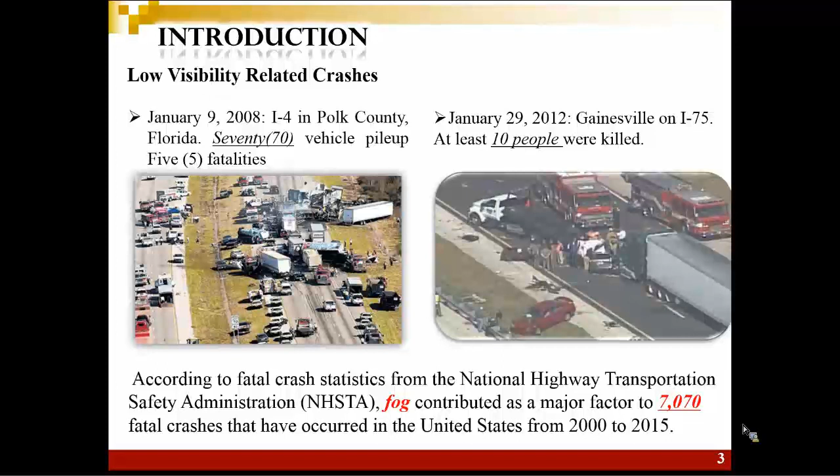In 2008, a 70-vehicle pile-up happened in Florida, causing 5 fatalities and many injuries. Another example happened in 2012, where at least 10 people were killed in that crash. Next slide, please.

In previous studies, a number of studies have investigated the change of driver behavior under fog conditions. Since some drivers tend to reduce their headway distance during fog, they may not have enough response time to react to dangerous situations, even if they reduced their speeds, which results in an increase of rear-end crash risk. Our previous study analyzed traffic patterns and found that both volume and speed under fog condition dropped significantly. By proposing a crash risk increase indicator, we confirmed that crash risk could increase under fog condition.

We also investigated the impact of fog warning systems, which include dynamic message signs and beacons as shown in the pictures, on drivers' speed adjustment for fog condition using a driving simulator study. We found that the warning system could significantly affect drivers' speed adjustment before they drive into the fog area, but could not sufficiently change drivers' final speed after entering the fog area.

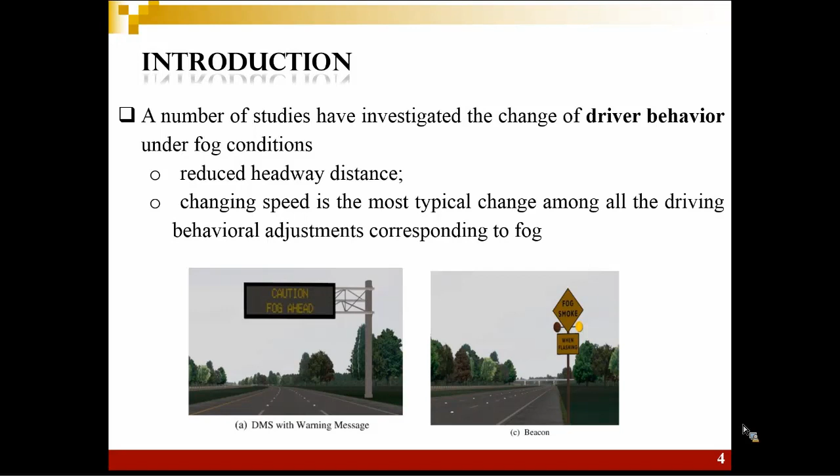Next slide, please. In recent years, connected vehicle crash warning systems are gaining increasing attention, which display a vista for enhancing traffic safety under fog conditions. Previously, crash warning systems were based on sensors and video cameras. However, bad weather could reduce the system's accuracy. Connected vehicles could further improve the performance of crash warning systems by deploying vehicle-to-vehicle communication or vehicle-to-infrastructure communication.

Vehicle-to-vehicle communication can provide real-time position and speed of the lead vehicle. Thus, the crash warning system can detect the sudden slowdown or stop of the lead vehicle and timely alert the drivers of the following vehicle with in-vehicle warning messages. Many driving simulator studies have been conducted to explore the impact of crash warning systems, while drivers' response time, throttle release behavior, brake pedal behavior, and time to collision could be deployed to evaluate their effectiveness.

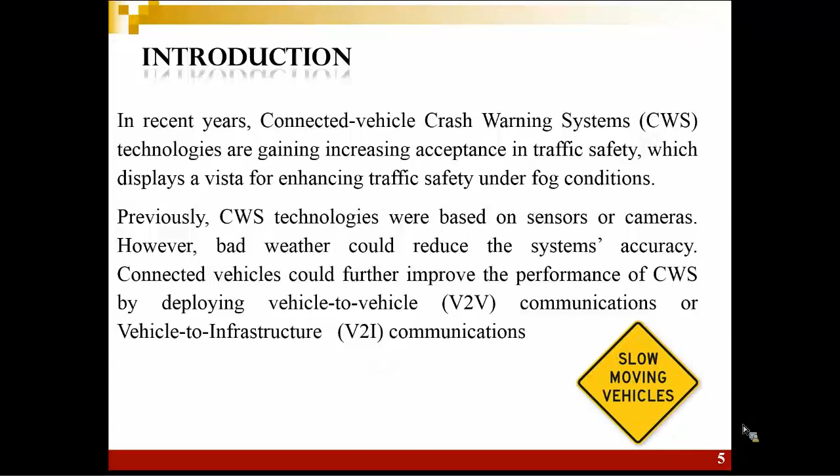Next slide, please. The safety benefit of crash warning systems has been evaluated in previous literature, and many studies have indicated that the warning system could effectively help reduce rear-end crashes. However, there is a lack of study on the safety effectiveness of crash warning systems on rear-end crashes under fog condition. Therefore, different from our previous study, which investigated the effect of warning systems on drivers' behavior in fog, the current study aimed to examine the effect of crash warning systems on drivers' rear-end crash avoidance behavior under fog condition, based on a driving simulator experiment.

Specifically, the objective of this study is to investigate whether warning systems have significant effects on drivers' rear-end crash avoidance performance when the lead vehicle makes an emergency stop. So now, let's look at the experimental design of this study.

The experiment was designed as a mixed factorial design with warning type as the within-subject variable, and fog level and age as between-subject variables.

Our previous study suggests that fog could have a significant effect on drivers' behavior when the visibility distance is less than 300 feet. So 300 feet was selected as the moderate fog condition in this study. Also, it was suggested that drivers could have very high crash risk in fog conditions when visibility distance is very low, since drivers could not have enough time to respond to an emergency. So 100 feet visibility distance was selected as the dense fog condition to test the effects of the warning system under dangerous situations.

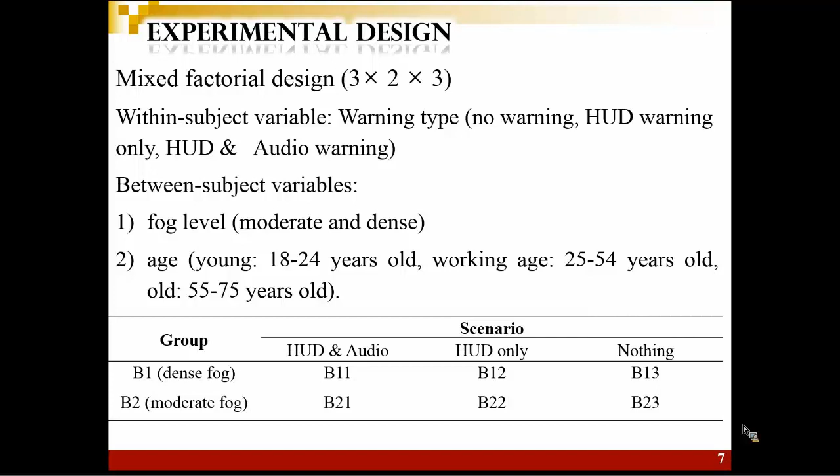An advanced driving simulator was used for this experiment. The simulator provides a 130-degree horizontal by 24-degree vertical field of view in front of the seated participant with 3 screens. Two speakers were installed in front to simulate the sound of passenger cars and deliver audio warning messages, and a third speaker was mounted below the driver's seat to simulate road vibrations.

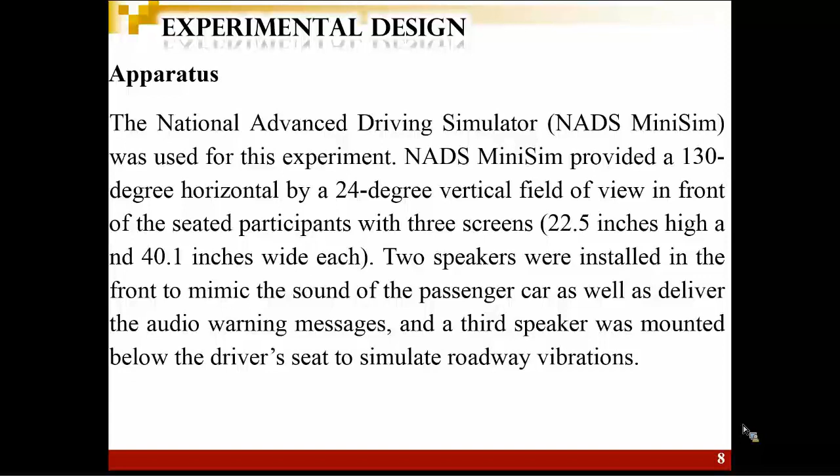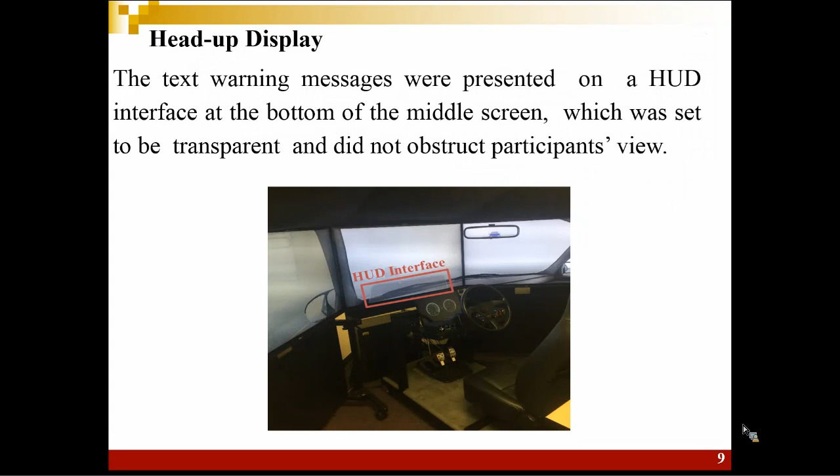As we can see from the picture, the text warning messages were presented through the HUD interface at the bottom of the middle screen, which was set to be transparent and would not obstruct the participant's view. The simulator was equipped with a 4-channel video capture system and collected driving data at a rate of 60 Hz.

Totally, 54 participants were recruited in this study, regardless of the driver's socioeconomic status. Each fog level had 27 participants, with 9 participants in each age group, and each participant performed the experiment under 3 warning conditions: no warning, HUD warning only, and HUD with audio warning.

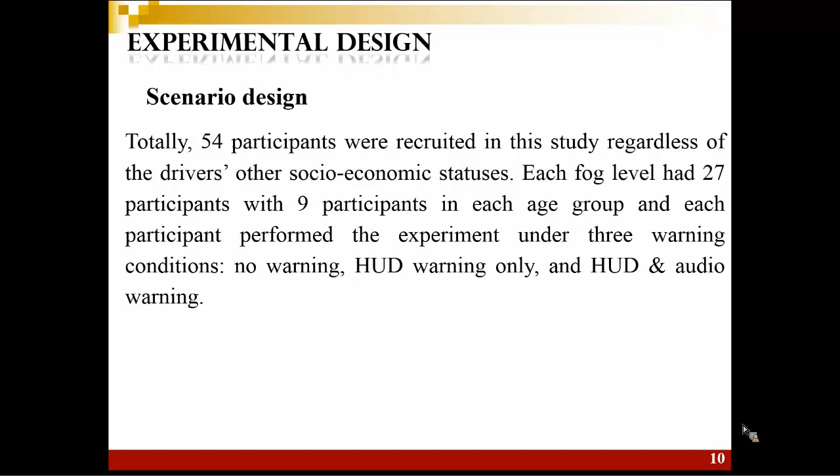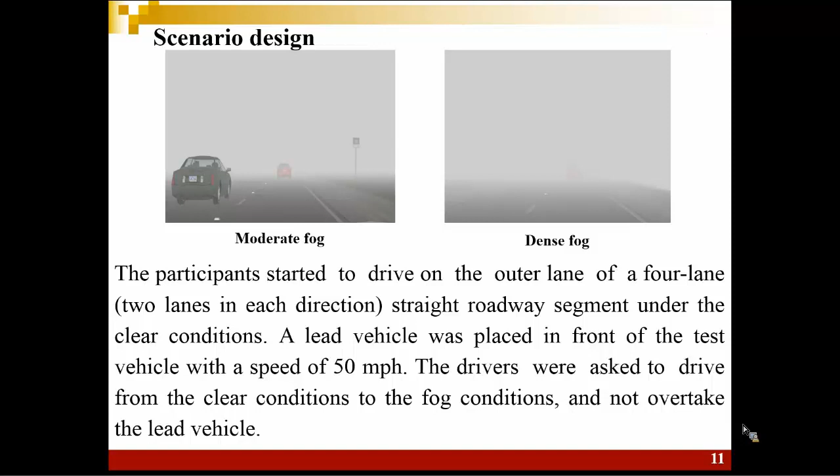These figures show the moderate fog condition and the dense fog condition during the experiment. Participants start driving on the outer lane of a 4-lane straight roadway segment under clear conditions. A lead vehicle was placed in front of the test vehicle with a speed of 50 miles per hour. The driver was asked to drive from the clear condition into the fog condition and not overtake the lead vehicle.

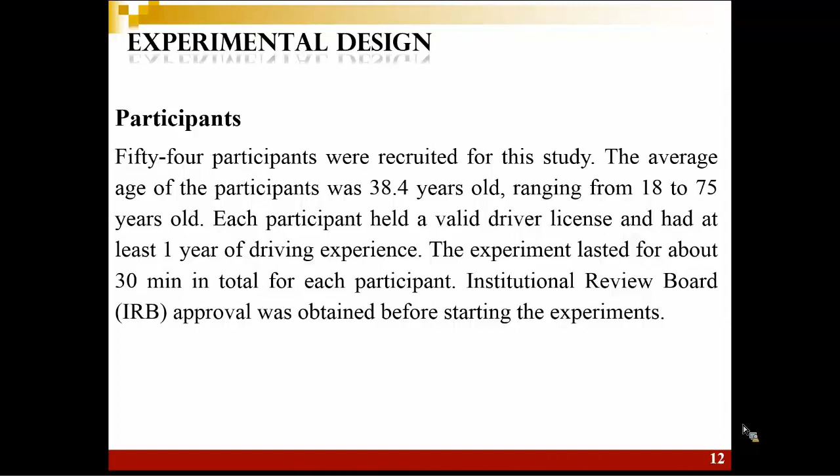54 participants were recruited for this study. The average age of participants was about 38 years old, ranging from 18 to 75 years old. Each participant had a valid driver's license and at least 1 year of driving experience. The experiment lasted about 30 minutes in total for each participant. IRB approval was obtained before starting the experiments.

Upon arrival at the lab, each participant was briefly introduced to the requirements of the experiment, and all participants were required to read and sign a consent form. Participants were notified that they could quit the experiment at any time in case of motion sickness.

Before the formal experiment, participants had at least 10 minutes to get trained and become familiar with operating the driving simulator. Then they performed a formal driving simulator experiment under either moderate or dense fog conditions with 3 different warning conditions in random order.

It should be noted that the gender of the participant was also carefully considered when assigning the age groups. Between each trial, participants could have at least 5 minutes to rest. After the experiment, participants were required to complete a survey about their experience with the scenarios.

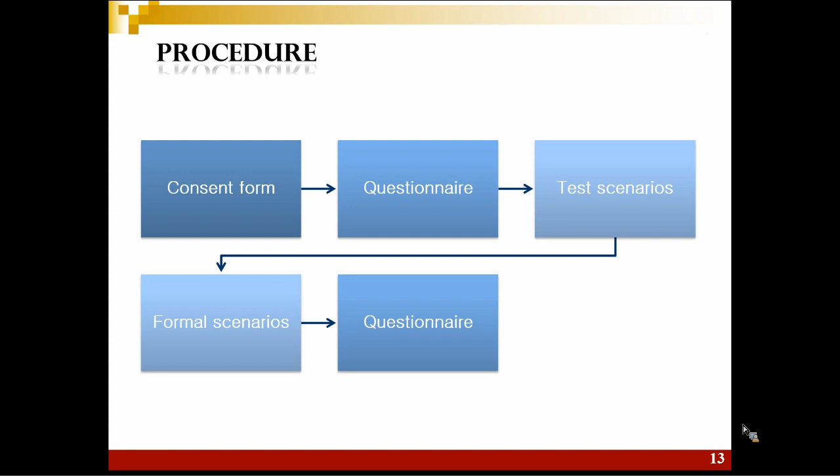During the experiment, after the lead vehicle started to decelerate, the warning message would be delivered based on the headway distance between the test vehicle and the lead vehicle. To avoid the cry-wolf effect of a premature warning message, the headway distance for delivering the warning message was carefully determined.

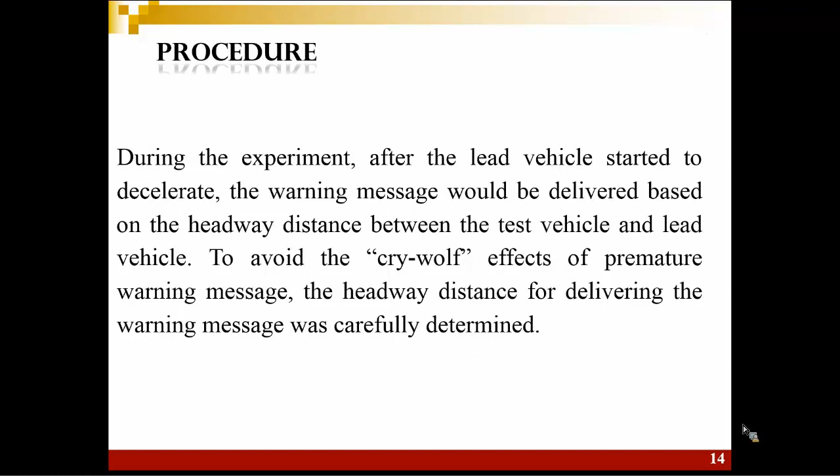Now let's look at a short video which shows an example of the studied scenario.

As we can see from the video, once the warning system was triggered during the experiment, the HUD warning would display the words 'slow vehicle ahead' for about 1 second. The HUD and audio warning delivered a beep sound along with the HUD message.

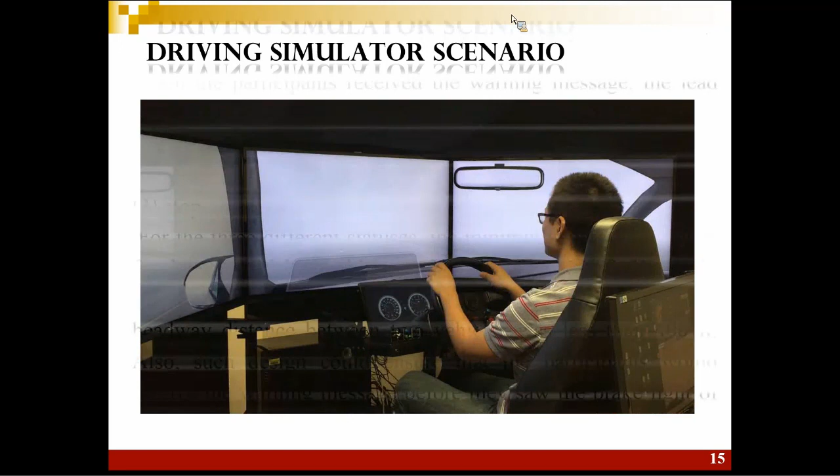When the participant received the warning message, the lead vehicle could be in 3 different states: starting to decelerate, decelerating, or stopped. For these 3 states, the minimum stop distance for the test vehicle would range from 110 feet to 351 feet. Hence, in this study, the warning message was delivered when the headway distance between the two vehicles was less than 400 feet. This design also ensured that participants would receive the warning message before they saw the brake light of the lead vehicle.

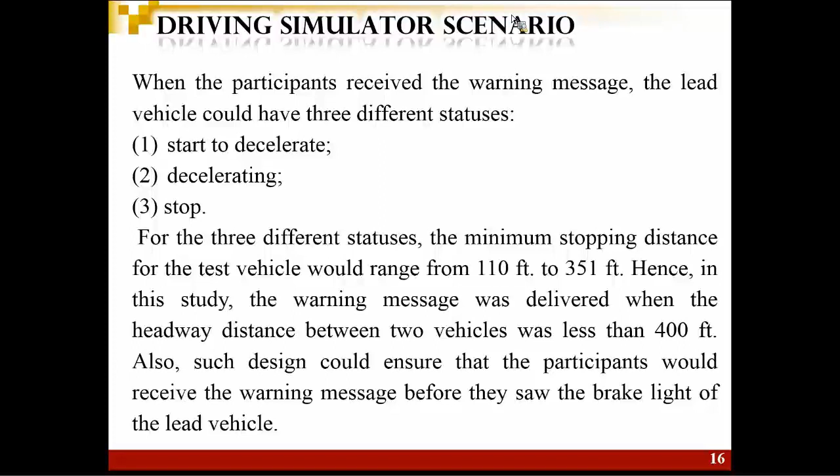We have some short videos to demonstrate driver crash avoidance behavior during the experiment. One video will show the change in the lead vehicle and following vehicle's speed, and another video will show the status of the throttle pedal and brake pedal. From the video, we can see that the driver releases the throttle when they notice the event and then begins to use the brake pedal.

This figure shows a typical example when the lead vehicle was braking. Based on the key time moments shown in the figure, several critical measurements were defined to evaluate participant driving performance.

Time to initial throttle release, time to final throttle release, and time to initial brake were used to analyze driver's throttle release behavior. Time to initial throttle release is the time between the onset of the lead vehicle's braking and when the participant begins to release the throttle pedal. Time to final throttle release is the time between when the participant began releasing the throttle pedal and when they completely released it.

Time to initial brake is defined as the time between when the participant completely released the throttle pedal and when they begin to press the brake pedal. Similarly, time to 25% of brake, 50%, 75%, and maximum brake were used to analyze the status of the brake pedal.

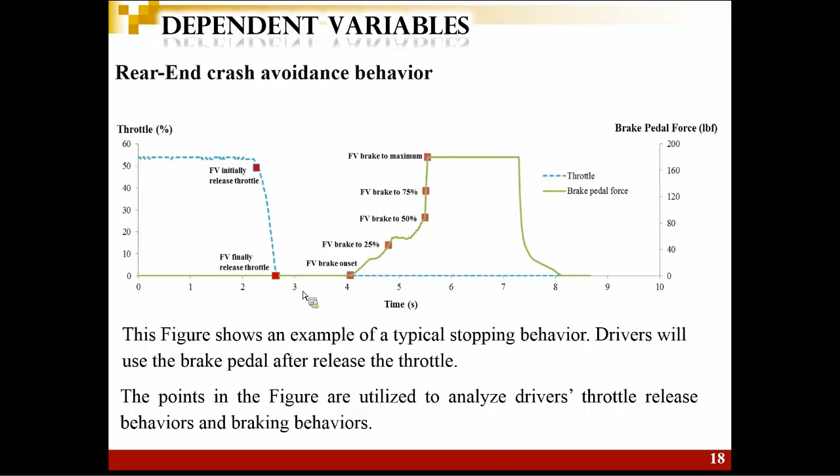Three other dependent variables are included in this study. The first is brake reaction time, defined as the time between the lead vehicle's brake onset and when the participant begins to brake. The second is minimum time to collision, defined as the time it would take for the test vehicle to hit the lead vehicle given their current speeds are maintained.

The minimum value is selected from the time interval between when the lead vehicle starts to brake and when the driver brakes to stop behind it. The last variable is maximum brake pedal pressure, the maximum value of brake pedal pressure observed during the braking event.

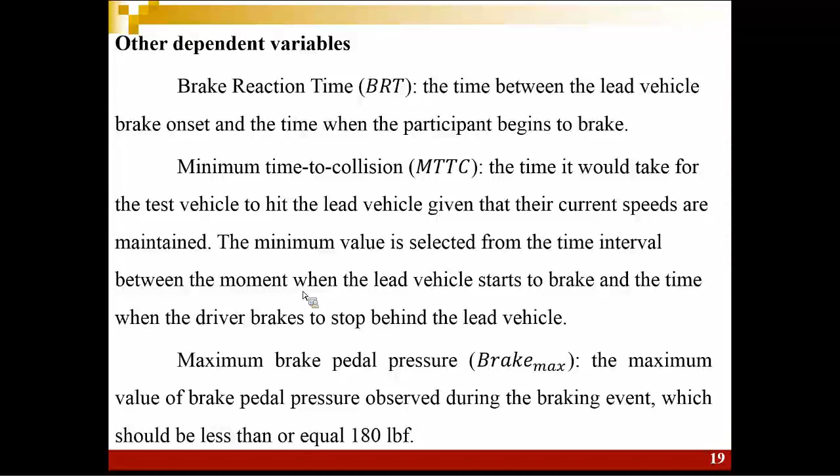For measuring participants' rear-end crash avoidance behavior, repeated measures MANOVA was conducted for throttle release measurements and brake transition time measurements, where high correlations were expected. MANOVA is a type of multivariate analysis used for data with more than one dependent variable, and it controls the overinflation of Type 1 error.

Repeated measures ANOVA was then conducted on the significant variables found by MANOVA analysis. For significant factors with more than two groups, post-hoc analysis was conducted to further compare differences. For other measurements including response time, minimum time to collision, and maximum brake pedal pressure, only repeated measures ANOVA and post-hoc analysis were performed. The statistical significance level was set at 0.1.

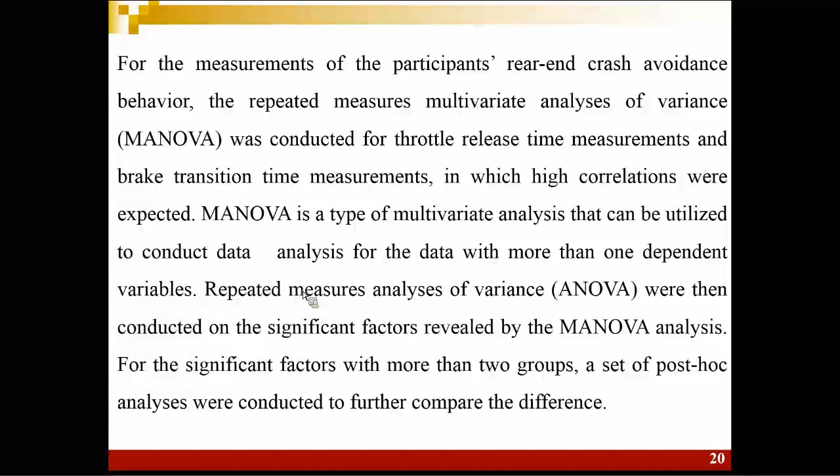So now let's move on to experiment results.

Although 54 participants were recruited in this experiment, only data from 48 participants were collected for analysis, since 6 participants could not finish due to motion sickness. Of the complete 144 trials, 7 were excluded because some participants chose to steer instead of braking to avoid hitting the lead vehicle, and some drove too slowly to follow the front vehicle. A dataset containing information for 137 trials was created for this analysis.

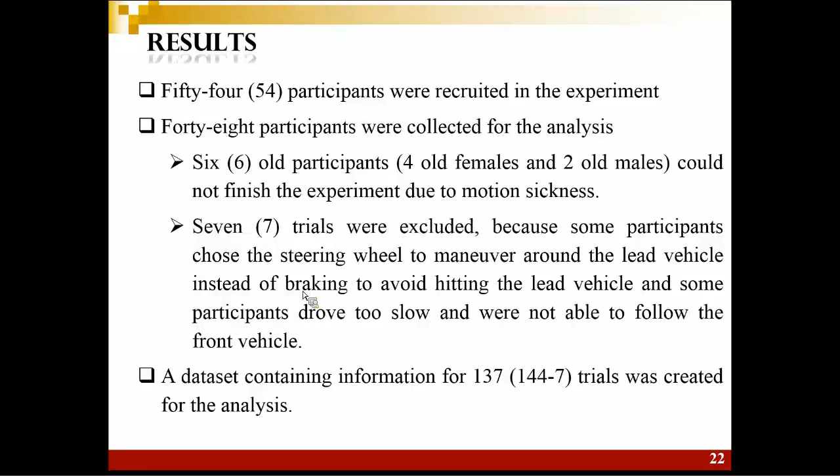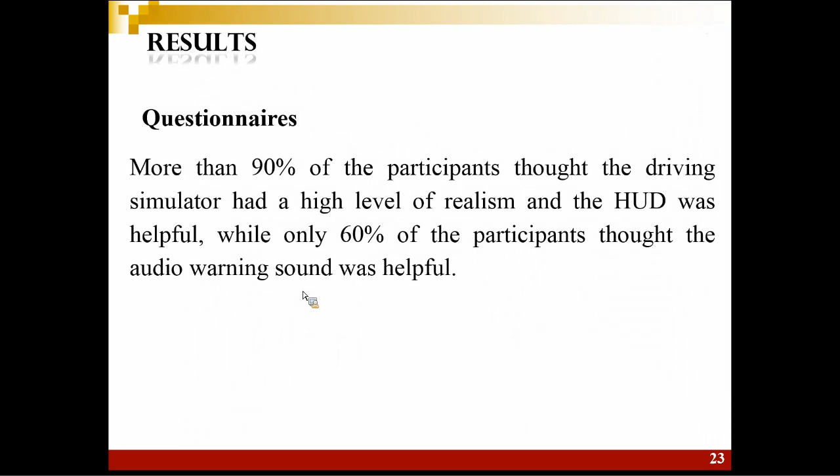For the questionnaire results, more than 90% of participants thought the driving simulator had a high level of realism and that the HUD was helpful, while only 60% thought the audio warning sound was helpful.

Three measurements were employed to assess participant throttle release time: time to initial throttle release, time to final throttle release, and time to initial brake. The repeated measures MANOVA analysis suggests that only warning type has a significant effect on driver throttle release time. However, no significant effect of fog level, age group, or gender could be observed in terms of throttle release time.

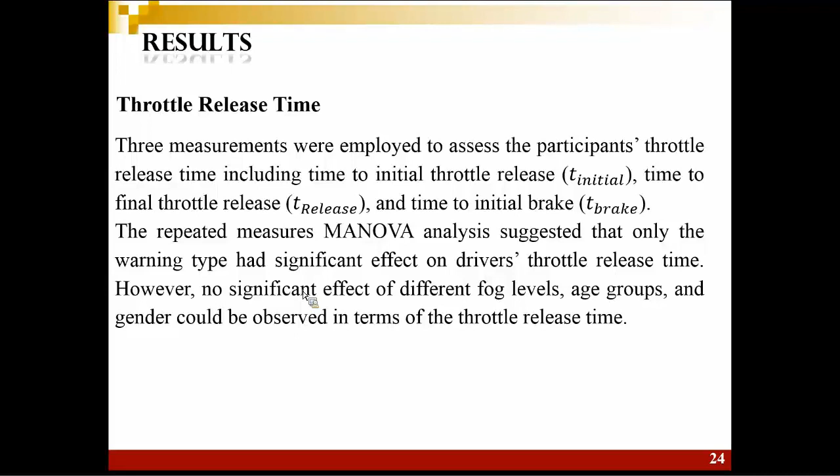The ANOVA results indicate that time to initial throttle release and time to final throttle release contribute to the multivariate effect. As shown in the table, post-hoc tests suggest participants under the no-warning condition needed more time to start and finish the throttle release behavior. Since drivers could know about the hazard event earlier via the warning system, they could react earlier to avoid potential collisions. However, there was no significant difference between HUD-only warning and HUD with audio warning.

This indicated that adding an audio warning system could not significantly affect participant awareness of upcoming accidents, and hence could not shorten the throttle release time.

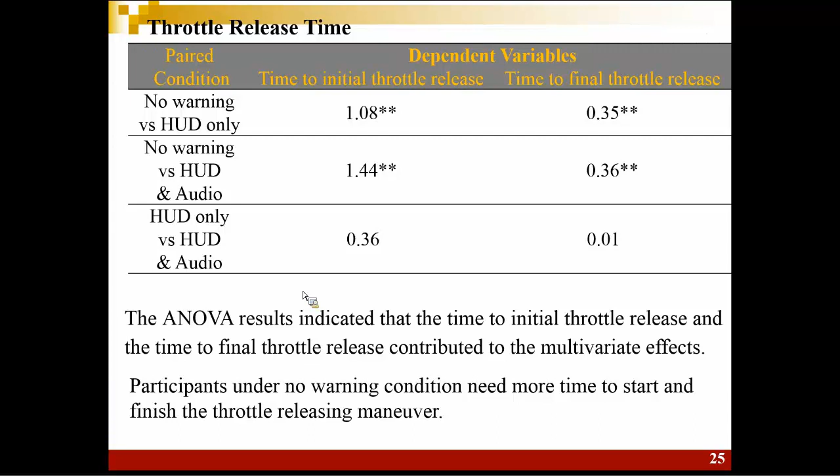The second variable is the brake time. Participant brake transition time was examined by 4 measurements: time to 25% of brake, time to 50% of brake, time to 75% of brake, and time to maximum brake.

The MANOVA test shows significant effect of warning type and age. However, there was no significant difference between moderate and dense fog condition in terms of brake transition time.

The subsequent repeated measure ANOVA analysis showed that warning type has significant main effect on both time to 75% of brake and time to maximum brake. As shown in the table, the post-hoc test indicates that time to 75% of brake and time to maximum brake become longer under no warning condition compared with the HUD with audio warning condition. No significant difference could be observed between the two different warning types.

In addition, the ANOVA test result of age shows significant impact on time to 75% of brake and time to maximum brake. The post-hoc test suggests that young drivers tend to spend longer time to reach 75% of brake and maximum brake pedal position compared with working age and old drivers. However, no significant difference was found between working age and old drivers.

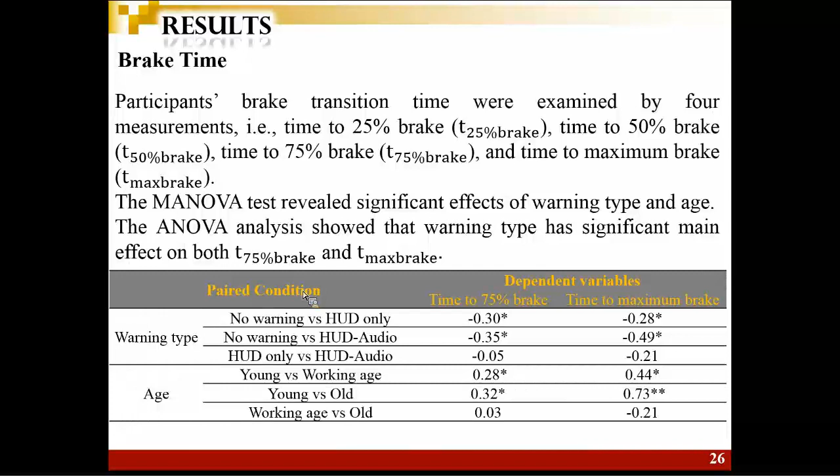The third variable is reaction time. The influence of warning type, fog level, gender, and age on brake reaction time was examined through a similar repeated measure ANOVA test. The effect of warning and age was significant. However, fog level and gender did not have significant impact on brake reaction time.

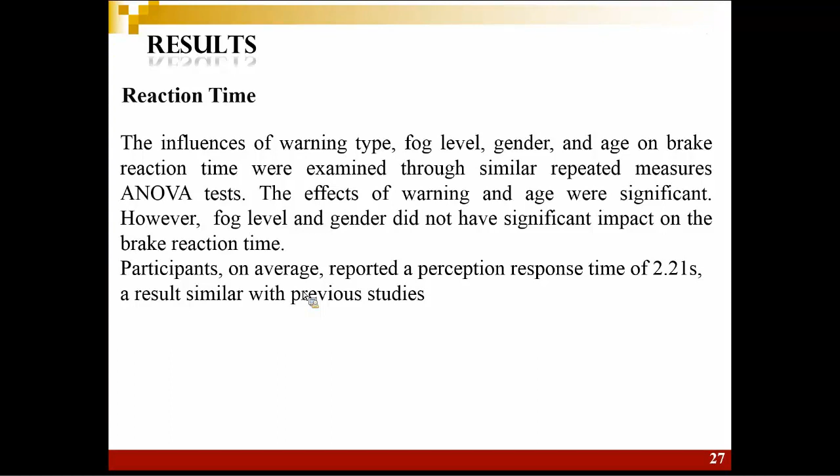It was also useful to note that no significant difference could be observed between the HUD-only condition and the other two conditions. Regarding the effect of age, the brake reaction time was the largest in the old age group, which indicates that old drivers need more time to respond to emergency events. However, the difference between young driver and working age driver was not significant.

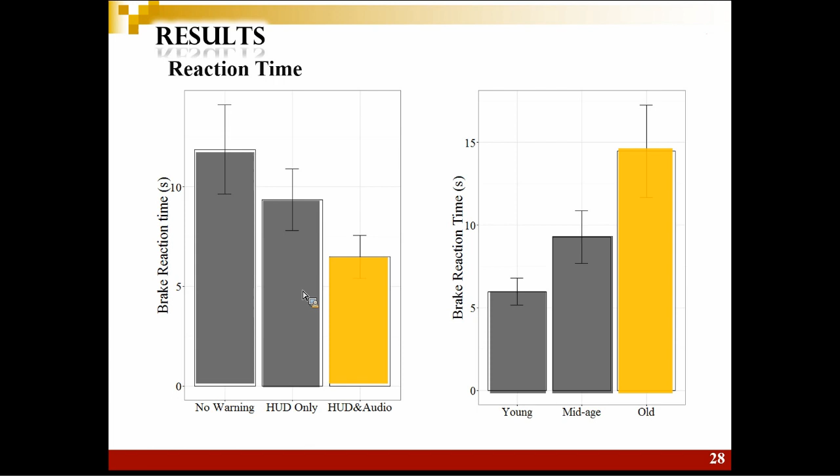The minimum time to collision is an essential surrogate safety measure to evaluate rear-end crash risk under fog condition. The ANOVA analysis suggests that the effect of warning type and fog level on minimum time to collision are significant, while the effect of gender and age are not significant.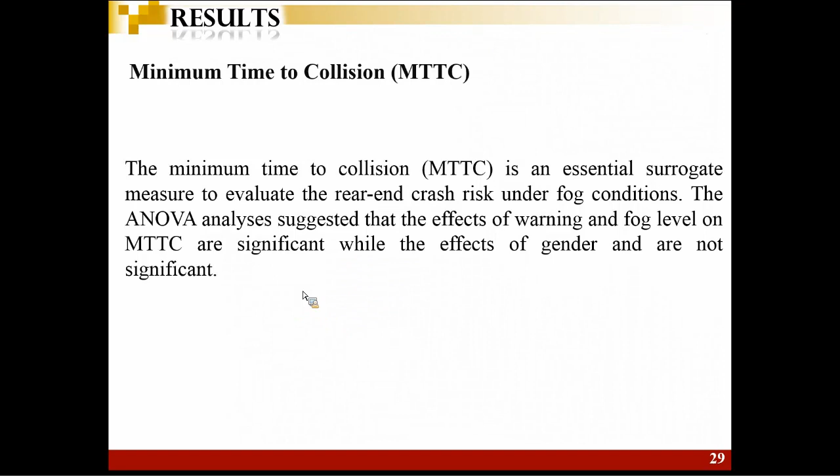The mean minimum time to collision for different warning types and different fog levels are presented in the figures. The post-hoc analysis indicates that the minimum time to collision under no warning condition was significantly lower than that under HUD-only condition. Although the HUD-only condition has higher minimum time to collision compared with HUD with audio warning condition, the

differences were not significant, which may be due to random effect. With the warning system, driver could become better prepared to avoid the potential conflict.

The right figure suggests that smaller minimum time to collision could be found under dense fog condition. Compared with moderate fog condition, the finding indicates that rear-end crash risk could increase when visibility distance decreases, which is consistent with previous studies.

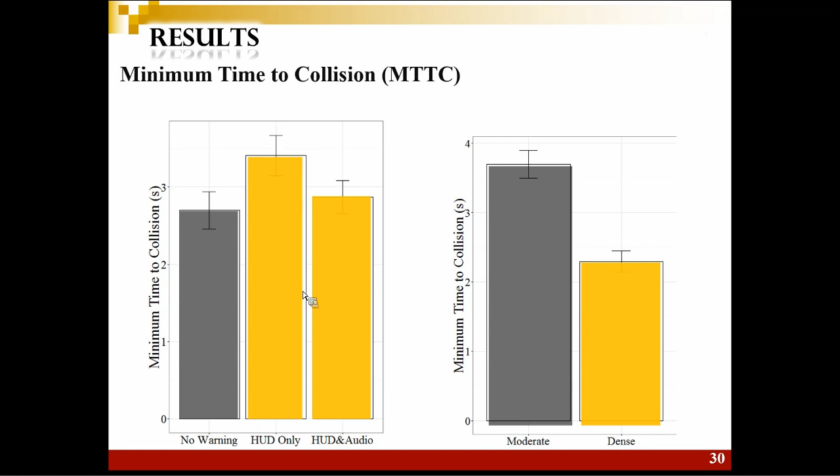The last variable is the maximum brake pedal pressure. The ANOVA analysis shows significant effects of fog level and age on maximum brake pedal pressure. However, warning type and gender did not significantly

affect maximum brake pedal pressure. The result of warning type indicates that the warning message would not affect driver's maximum brake pedal pressure if the participant had already realized the risky situation through either seeing the brake light of the lead vehicle or noticing the warning message.

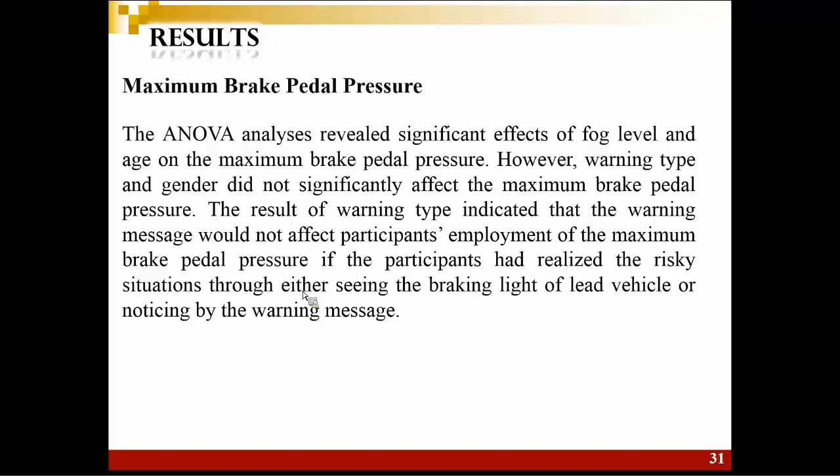The mean maximum brake pedal pressure for different fog levels and different age groups are shown in the figures. The left figure indicates that drivers would employ larger brake pedal pressure under dense fog condition compared with moderate fog condition. As for the effects of age, old drivers tend to have larger maximum brake pedal pressure compared with the other two age groups.

And there is no significant difference of brake pedal pressure between young driver and working age drivers.

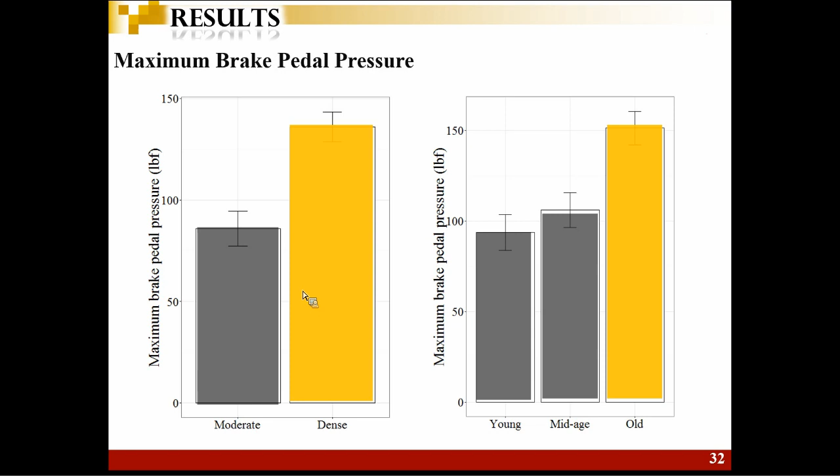So finally, let's discuss the summary and conclusion.

Previous studies suggest that drivers could make better decisions if they get prepared for the upcoming road conditions. Whether a driver could successfully avoid rear-end crashes depends on how quickly the driver can identify the upcoming crash and conduct crash avoidance actions. In this study, both shorter throttle release time and shorter reaction time could be found with

the presence of a warning system, which indicates the advantage of the warning system. Meanwhile, driver's brake process could be smoother with the warning system. In addition, drivers could have greater minimum time to collision with the warning system, which confirms the benefits of crash warning

system under fog condition. In this study, both the start moment of the warning message and the moment when participants see the brake light of the lead vehicle could be regarded as stimulus, and the response to the stimulus of each driver under emergency situation is relatively similar.

So drivers would have similar maximum brake pedal pressure. Meanwhile, previous studies suggest that multimodal crash warning systems could further improve drivers' rear-end crash avoidance performance. However, no significant difference was identified in participant throttle release time, brake transition time, or other performance measurements between the HUD-only group and HUD with audio warning groups in this study. This phenomenon is possibly due to the fact that drivers are prone to be more careful when driving under fog conditions.

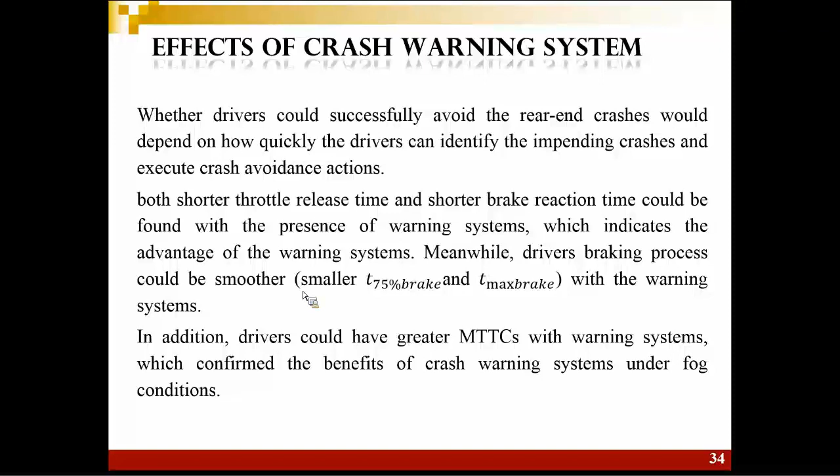Car following in fog is a complex task since participants need to consider the interaction between their speed and the lead vehicle's speed. Previous studies have confirmed that participants tend to adopt safer driving behaviors under fog conditions, such as reducing speed and getting less distracted, to avoid potential crashes arising from the reduced visibility.

In this study, no significant effect of fog level was observed for the participants' throttle release time, brake transition time, and response time, while participants would press the brake pedal harder in dense fog conditions. However, a relatively smaller minimum time to collision was found under dense fog conditions, which indicates that the increase of brake pedal pressure was still not sufficient to compensate for the increase of risk caused by reduced visibility distance. When fog became dense, participants in the test vehicle could not see the brake light of the lead vehicle, resulting in high rear-end crash risk.

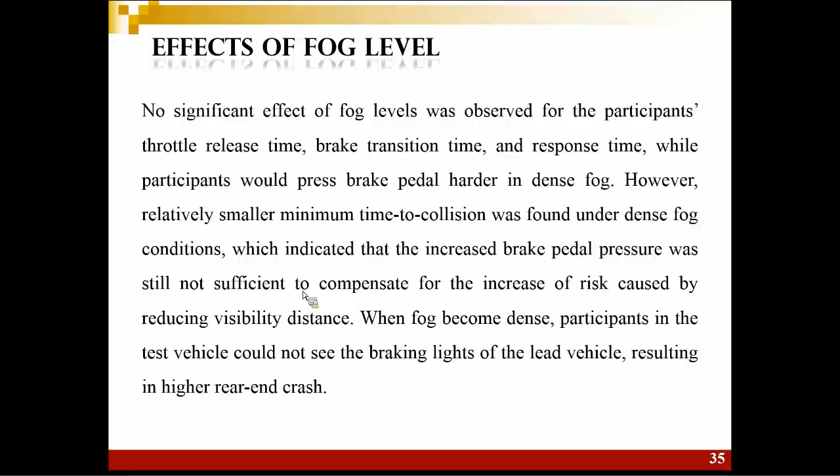As for the effect of age, old participants had significantly longer brake reaction time because they need more time to do mental calculations. Although working age drivers need longer brake reaction time compared with young drivers, the difference is not significant.

In addition, young participants spend longer time to reach 75% of brake and maximum brake pedal pressure, which means that their braking process could be smoother than other participants. Meanwhile, since old drivers start to brake relatively late and they were more sensitive to the potential risk, they had to brake harder to avoid crashes.

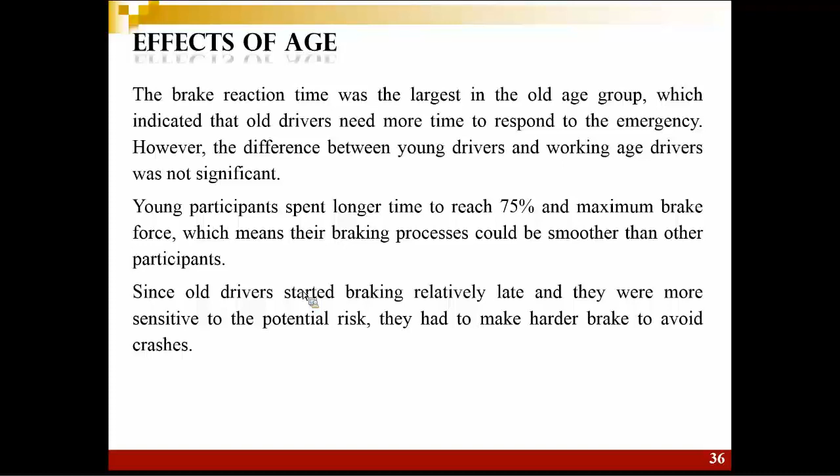Although some previous studies found that male drivers are more likely to engage in risky driving behavior, no significant gender effect was found in this study, a result in line with other previous fog-related driving behavior studies. It might be because, when driving in fog, male drivers' risky driving behavior might be counteracted by speed reduction and other compensation behaviors in fog.

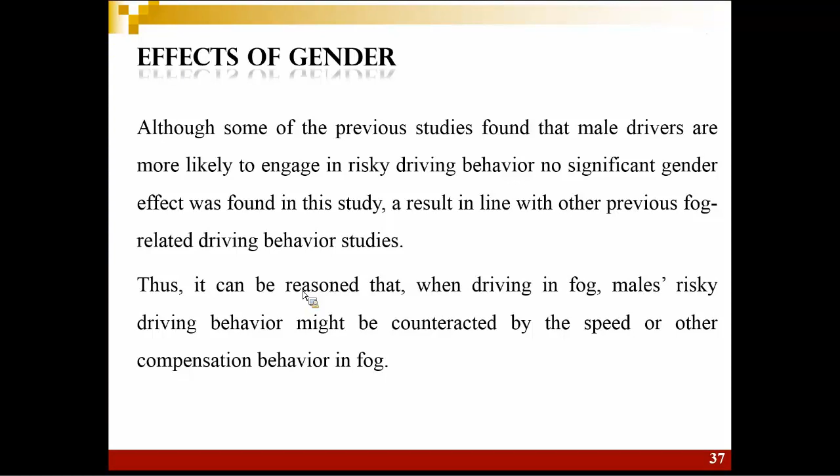So this study investigated the effectiveness of connected vehicle crash warning systems on participants' performance during the process of rear-end crash avoidance under fog conditions. Scenarios were specifically designed for rear-end crashes caused by the emergency stop of the lead vehicle. These experiments were designed to test different warning types along with different fog levels and participants' age groups.

This table summarizes the effect of the tested factors on participants' rear-end crash avoidance behavior. Participant throttle release time is only affected by warning type, while participants' brake transition time could be affected by both warning type and age. Response time could be affected by warning type and participant's age. In addition, minimum time to collision is affected by warning type and fog level, while maximum brake pedal pressure could be affected by fog level and age.

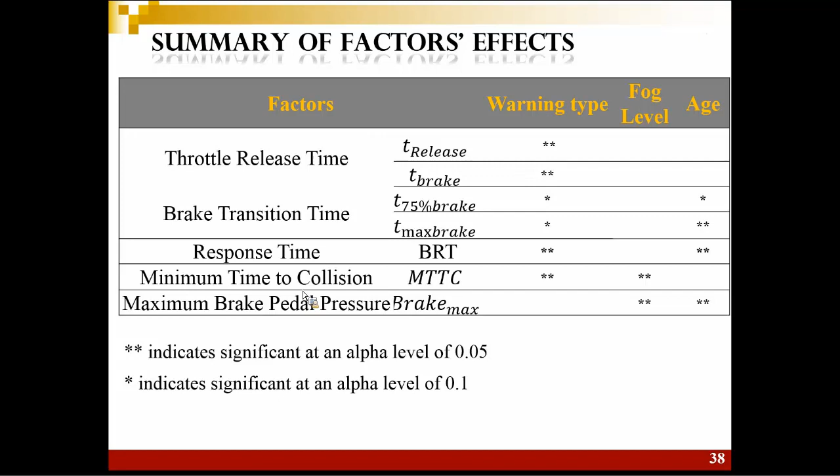To conclude, the experiment results indicated the positive effects of the crash warning system on safety. It was found that the warning system can significantly reduce drivers' brake response time and increase minimum time to collision. Also, no significant additional effect of audio warning could be found. The decrease of visibility distance could increase crash risk, and old drivers are more vulnerable road users under fog conditions. No significant gender effect could be identified in this study.

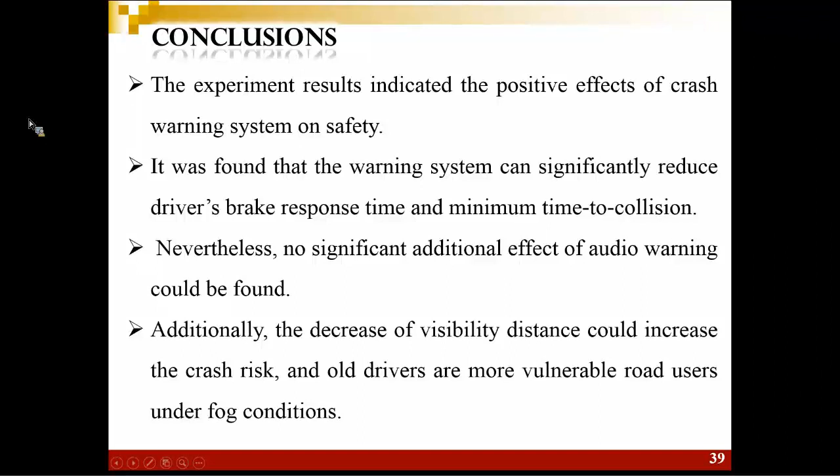Thank you. I will be happy to take your questions.